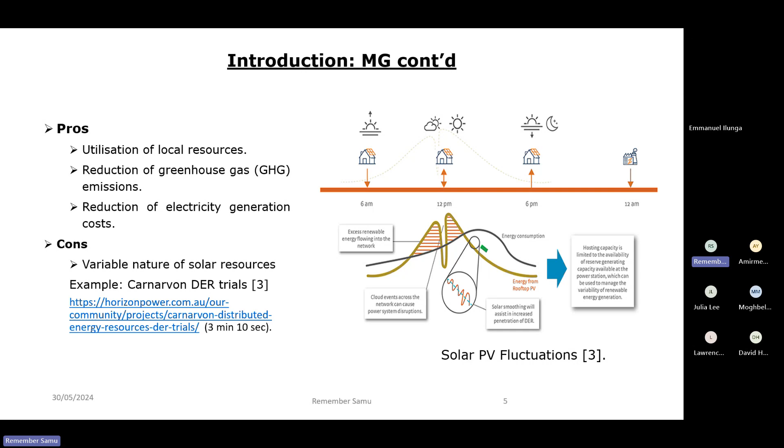One way of trying to minimize this effect of variability of PV is for us to be operating—if it's a remote hybrid microgrid, let's say it has got diesel generation and PV generation, and at this point let's say we exclude batteries—what will happen is that I will basically have to have a high spinning reserve to cater for the unknown drop in PV. So in this case, I'm going to have to run my diesel generators almost all the time at high spinning reserve.

So an example of such an event, where there was a lot of PV coming in and a cloud suddenly passed, actually happened in the place of this study, where this study was mainly focused. It's a remote area in Western Australia called Carnarvon. This small video will capture what happened in one of the days in Carnarvon.

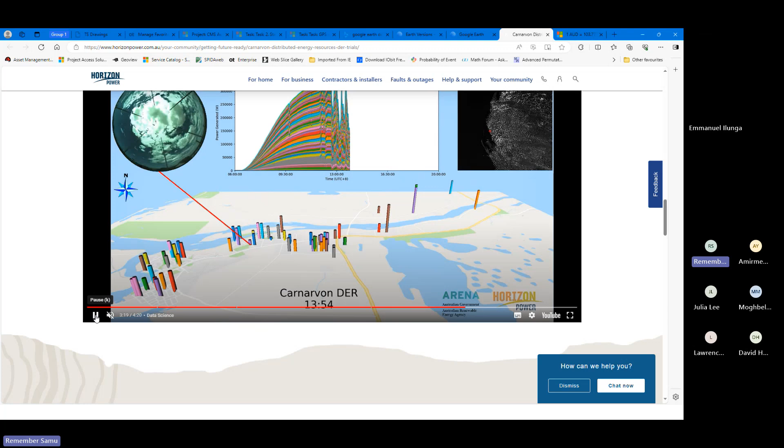What we're seeing there are distributed solar resources within the vicinity of this research. At one point we were having PV output generation fluctuating. A cloud was literally passing over this area, and this happened in real time. What we can see in the top left corner, depending on your screen orientation, is a camera showing how the cloud was passing through different PV systems, and the output of this being shown, where the power generation in watts in this distributed system was shown.

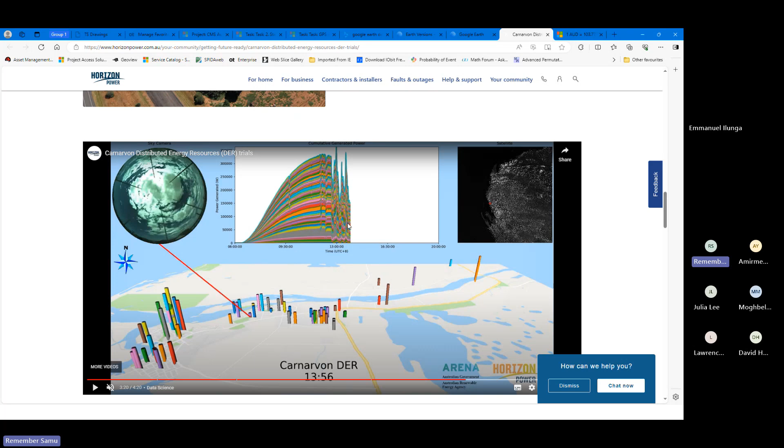This is actually a problem, because if this is happening and I'm not capturing that effect, not mitigating it on my system, then my system will either trip because I don't have enough generation, or at that point I will have more generation than what I need, because I'm not capturing that. All I can do is end up curtailing a lot of PV output because I'm not sure what's coming. Now, to mitigate all those effects, that's how I came about the problem we faced: with this increased distributed system, there's a variability in the generation output.

Now, this variability, how they're trying to cater for it right now, is either running a system with high spinning reserve. That is, at that point, you're having probably more than base load covered already, and limiting the PV output. So at that point, you are not utilizing full resources.

If you look at a real world scenario, Horizon Power, this utility, what they were doing before was having what they call hosting capacities. This was basically a way of saying, this is only the amount that we can actually put into our system. As of end of last year, they actually removed this capping of PV systems and tried to have ways of controlling as much PV as you can put without actually putting a cap on it. So this is the problem that we figured out.

So this research talk today is to try and see if we can minimize the effects of this, and if we bring in a new technology system, or a new system that will have a control strategy that will not minimize the penetration of PV, and at the same time will minimize the use of high spinning reserve, or the use of diesel fuel that is maintaining lower spinning reserve.

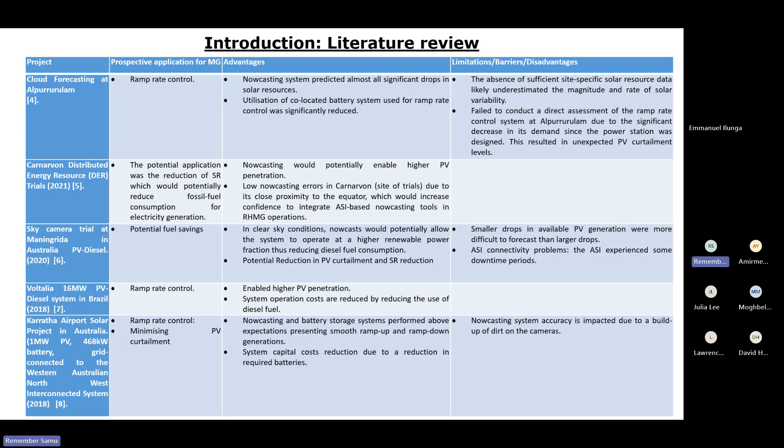Looking into different studies that were done, most of them are in the Oceania region, where there are small microgrids around the islands, and some here in Australia itself. They've tried to develop systems that do this nowcasting, but they were missing the controllability, or the automation of controlling the PV output, or they were missing the real life scenario of testing this—meaning using a real network to actually test the system they developed.

So this is what brought us to how I performed the method now. In this development, what we did first was to try and capture the thoughts of actually using nowcasting in trying to minimize—integrate it into microgrids and try to minimize the use of diesel fuel.

So this survey was an international online survey that was sent to developers of nowcasting tools, researchers working in solar PV or solar output forecasting, and industry people like developers or engineers operating microgrids, including remote microgrids.

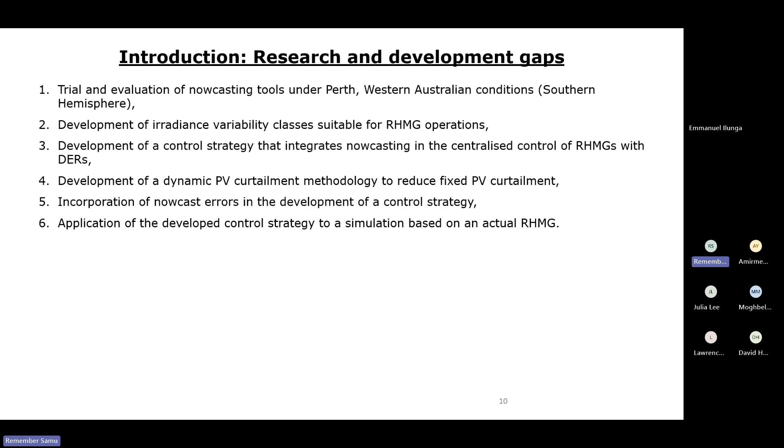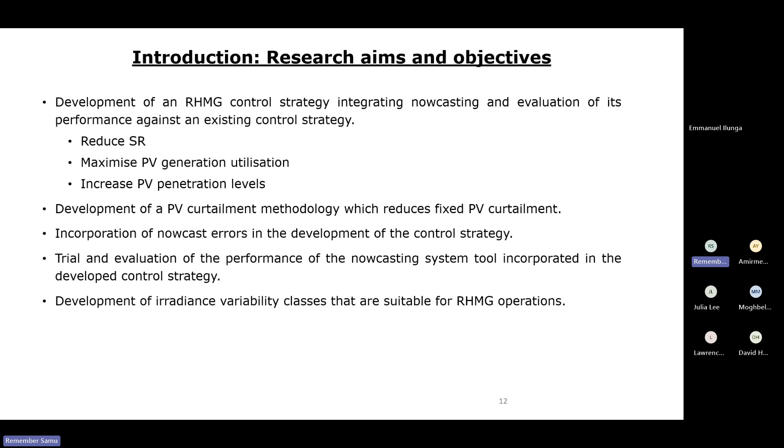All that would just be trying to answer the question that we raised in the questionnaire itself. So without wasting any time, we went into the methodology itself, where we did a bit of literature, then I did that survey, then after the survey we incorporated the literature and the survey.

Next we'll actually have the system, the nowcasting system, and do a trial of that system for the first time in the Southern Hemisphere, have it run and see how it operates compared to other sites that have been evaluated, then incorporate it in my realistic microgrid and run it to see the benefits. Basically that was what we did.

To start with, this was what the system looked like. Our system is called a nowcasting system. So nowcasting, like I said, is forecasting.

It uses sky cameras, meaning sky-facing cameras. There's a bit of research and calculation into the distance of separation of the cameras and the number of cameras you can use. In my case I used 2 cameras, separated by around 600 meters apart.

All of them were logging into a server, every 10 seconds, logging a new image. I also have other sensors to help with the forecast: a pyrheliometer for direct normal irradiance, diffuse horizontal irradiance, and global horizontal irradiance, all measured, plus meteorological data like wind speed, used as inputs to my nowcasting system.

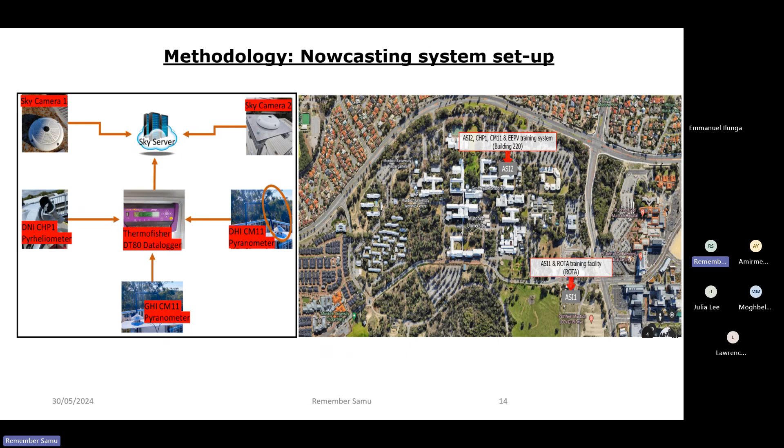Once I generate those 2 images, I enter them into my software, which is modeled entirely in MATLAB, though it's a bit of a complicated MATLAB code. I take those 2 images, put them in, and add the meteorological data that I mentioned.

From that software, with these 2 cameras, I would have a sheet which measures 8 kilometers by 8 kilometers. That's the surface area I can cover with these 2 cameras, so I can see 8 kilometers by 8 kilometers of my sky, and I can see all the clouds.

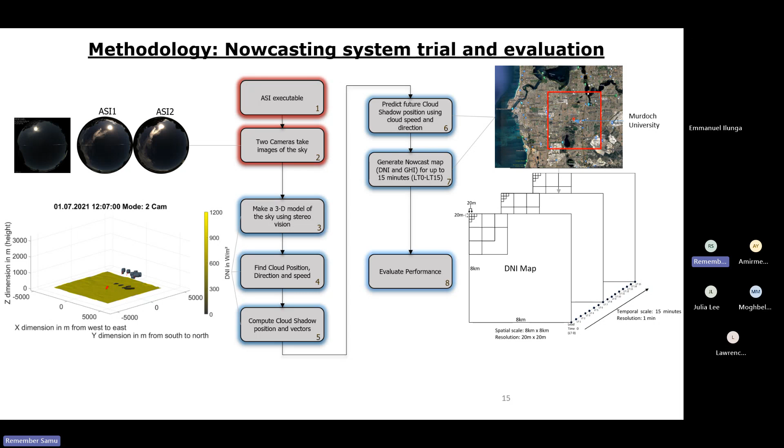So this first trial was to try and evaluate this system, the way it operates, and its accuracy. From there, I developed these 3 classes now. What I just need for controlling a PV system in a real life scenario is to know whether the day is going to be clear, overcast, or intermittently cloudy.

All right, so if it's partly cloudy or intermittently cloudy, or if the day is going to be clear, then I use these other metrics. There's a whole body of research that I did, a whole publication, and some metrics that I used to predict these 3 day types first, just from looking at the irradiances.

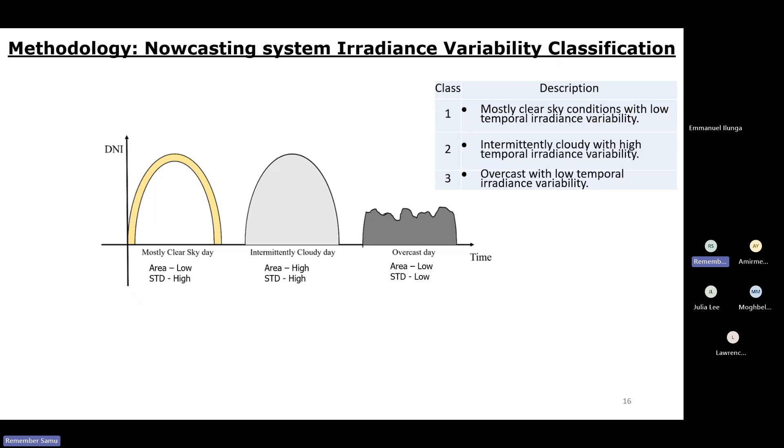Then after predicting those 3 classes, what I'll do is see - because I was using the RMSD, or root mean square deviation, which are metrics I use to check accuracy in any forecasting - just looking at this RMSD for my particular system, if we look at the graph where my mouse is, where it says direct normal irradiance DNI results.

If I look at my horizontal axis, this is looking into the lead time. So lead time 0, 1 up to 15 just means 1 minute ahead forecast, 2 minutes ahead, as I go until 15 minutes ahead forecast. Then here I'm looking at the root mean square deviation, meaning the error in my forecast as the lead time increases. So what I'm looking at now are those 3 classes I developed.

If you look at the class that has got the highest errors, it's the intermittently cloudy class, which is sort of reasonable in the sense that it's very difficult to capture the errors if I've got a lot of fluctuations in my output, in my irradiance.

But again, if I look at the 3-minute mark of that, it's not so bad, because I can still use this, as I'll prove later. I can still use up to 3 minutes. The error is still okay to incorporate in my control strategy and still find benefits out of it. Now, if you look at the one that has got the least errors, it's the overcast class. Where my sky is literally overcast, there will be minimum errors in my forecast, which is meaningful.

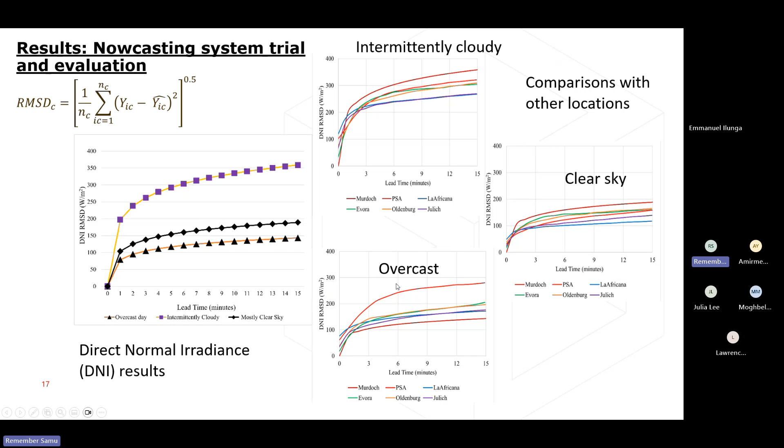Now, the next step was to go into, so this conclusion was the system was good compared to other systems, it was comparable. Then for clear sky and overcast, I've got very low mean absolute deviation and root mean square deviations, and intermittent cloudy has got higher, which is as expected.

Now these 3 classes that I developed - depending on what you want to use the system for, you can go into fine classification where you have more than 3 classes. Other systems had more than 8 classes because they were doing even finer classification of these cloud types or irradiance types. So these 3 classes that I developed are comparable and can be used - that's all I need to know, whether it's overcast, sunny, or intermittently cloudy, for me to run my algorithm of controlling remote hybrid microgrids.

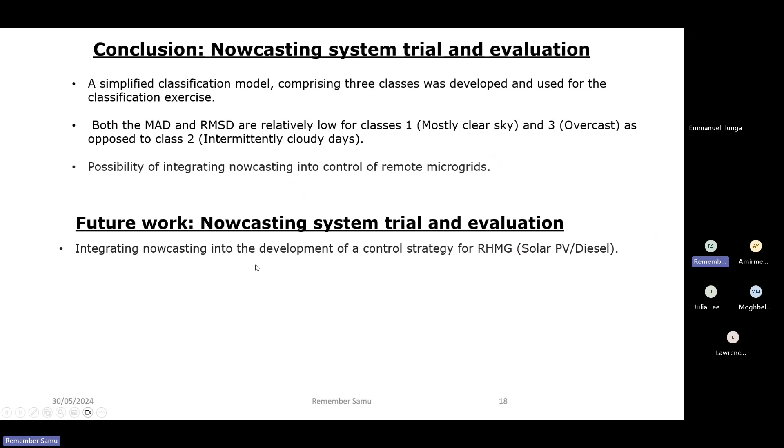Now, nowcasting system trial and evaluation came into place. At this point, we said, having this nowcasting, I've proved that the system is actually operable. It's operational, comparable to other systems.

Now, if I've got distributed solar resources, and I've got a system with diesel generators, can I then control centrally? Can I have a central control to satisfy my load 100% of the time, but try to utilize as much PV as I can with minimal curtailment, because I know the future, and just be able to switch on my generators when I need them and reduce the spinning reserve. So this was the next goal, trying to develop such a system.

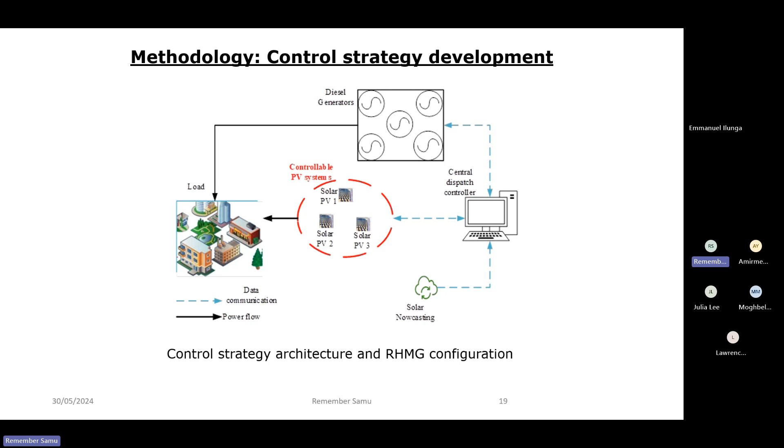So how I did it was basically to say, I've got 3 possible scenarios that can come up. If I look at my system or my output of my PV at, for example, 12 p.m., and I want to predict what would be my output at 12:03, 3 minutes after 12, 3 possibilities can be in place. One is I'm going to predict a higher output 3 minutes ahead, I'm going to predict a lower output 3 minutes ahead, or it's going to be equal. Okay, where equal might never be the case, but when I'm actually developing this algorithm or control strategy, I need to have that system almost in place. So that was the whole scenario.

If in 3 minutes ahead I'm predicting a higher output, I would look at how high this output is compared to my load, the load that I want to satisfy. If this output being predicted together with my diesel is going to be higher than my actual demand, then probably I need to switch off a diesel so I can still maximize the use of PV.

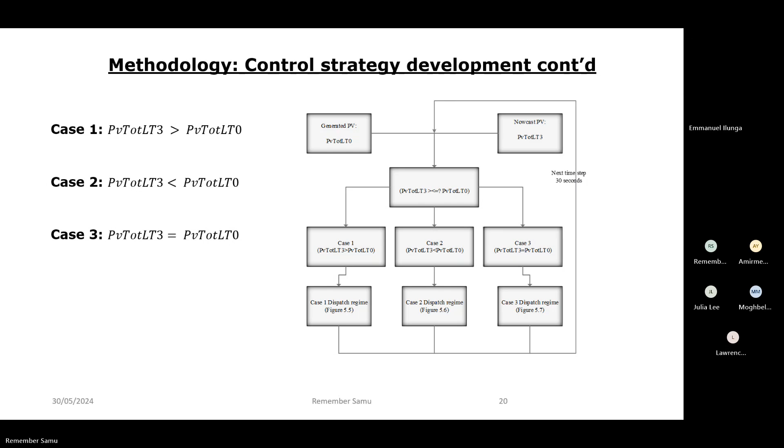So that was one scenario. The other scenario is if I predict less than what I can satisfy with my current mix, I'll need to switch on a generator if I don't have enough PV coming in the next 3 minutes. I can switch on the generator now, in time for those 3 minutes ahead. So these were the scenarios that would come up.

In designing this, first of all, as raised by the survey participants, they asked, what about the error in your system? Are you going to consider that error?

So I did, because I calculated the errors in my system. I did a worst case scenario design where, without any error, the top graph would be my output, my GHI for example. But if I introduce an error, over about 10 hours of a day, roughly 7 a.m. to 5 p.m., with the error this would have been my output.

So I designed my control strategy by incorporating the error. I would do it without the error, then also incorporate the error, and check whether my system would still be beneficial if the worst case scenario occurred, and what my output would be. So I considered these errors and formulated methodologies to incorporate them into my study.

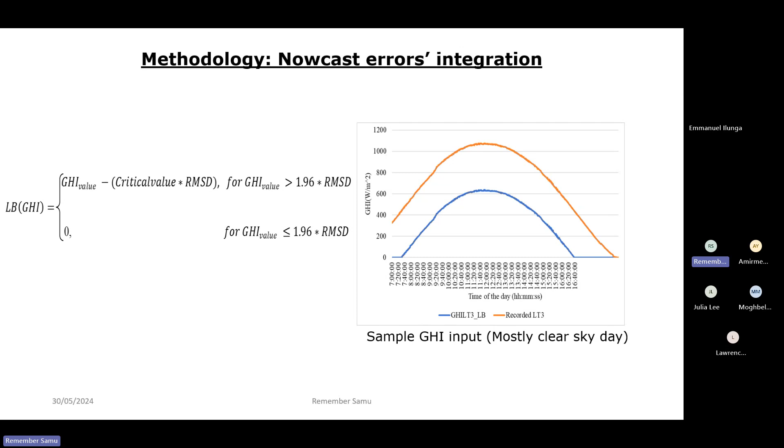Then there were 3 PV systems, modeled at 2.3 megawatts each. The reason is, without any curtailment, this was the maximum that could be put into the current system with a constant load. This is a pointer that could be worked on further, where we can have variable load in that.

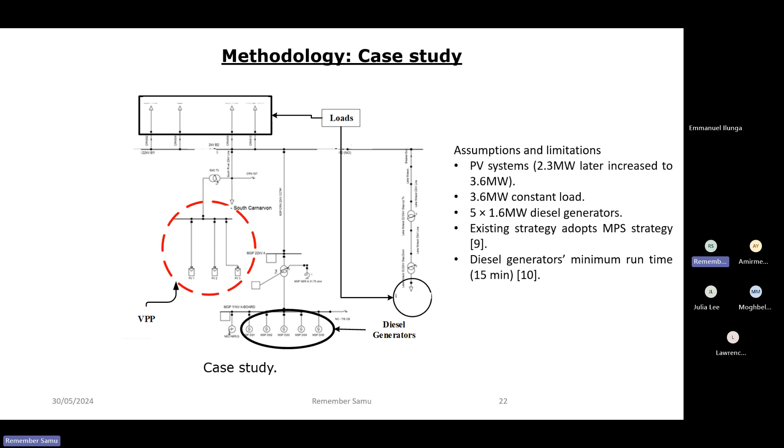With that system, the existing strategy would work like this: if it's intermittently cloudy, for example, we've got 3 generators on at this point because I'm trying to cater for the cover of that particular cloud that's coming. I don't know how much it's going to cover, but I still need to satisfy my load, so I run 3 generators all the time, depending on not knowing how much I'll lose, to cover for the unknown drop in PV.

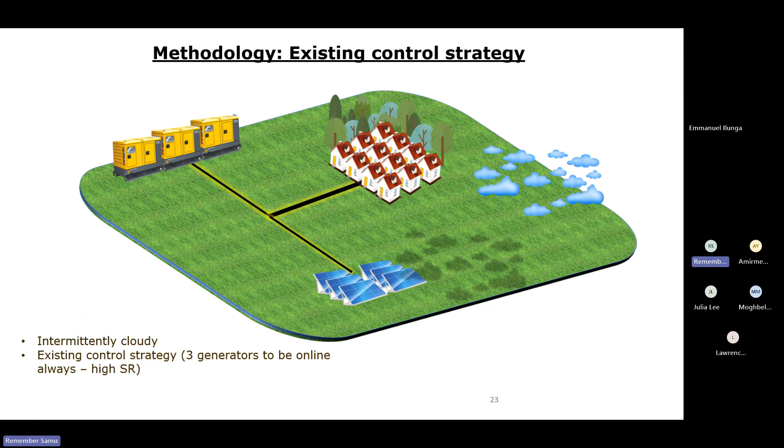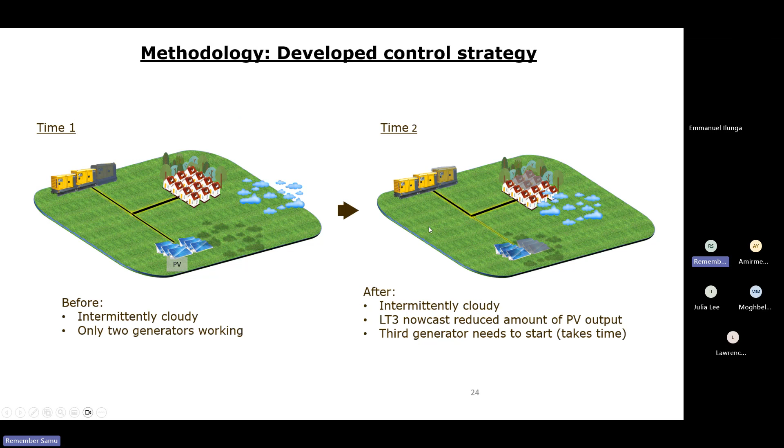Now with the developed strategy, at time 1 I can see the cloud coming. I've used my generator and everything, but because I know the direction of the cloud and when it's going to get there, I can be happy to run 2 generators instead of 3, until I know that in 3 minutes, at time 2, the cloud will cover this part of the PV, and then I can turn on my 3rd generator in time. That's the developed strategy: use 2 generators, then switch on the 3rd generator in time if needed. That's the whole concept.

I know the position of my cameras, so I can map my clouds and map my sky. With that mapping, I develop the direction and speed of the cloud, know how much area it's going to cover, and later know when to switch generators on or off. This is the basic operation of how this system would work.

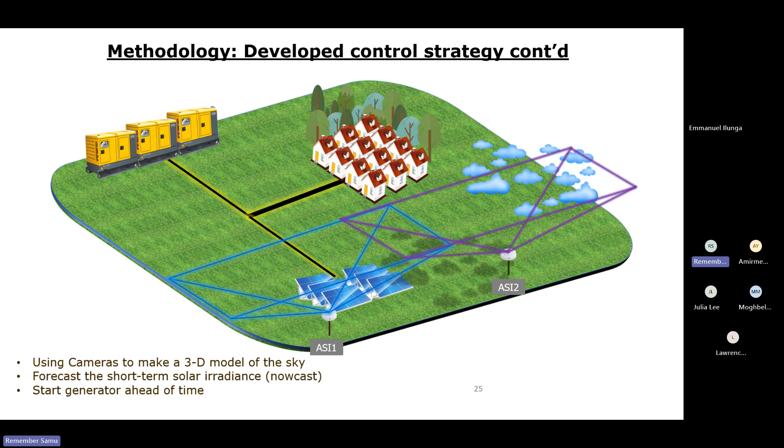Now, into the results. The first thing we did was look at an example of an intermittent cloud, which I've produced here. Of course, I had other classes and different scenarios, but this one is more interesting to capture, to see what would happen in my actual case with variable output of generation. So if you look at the graph labeled existing control strategy, adopting the Mungullah power station strategy, this is actually the power station where this strategy is currently applied.

They were running between 1.6 to 3.2 megawatt. That was the range of their spinning reserve strategy, so that their spinning reserve would keep to be up in that sense.

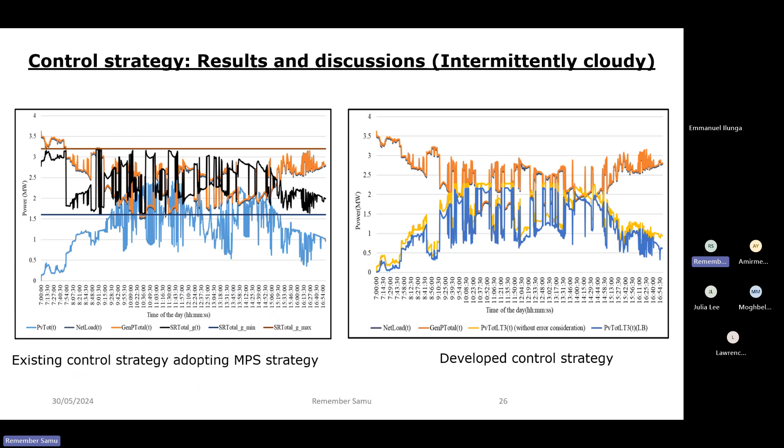Now just to zoom into this particular output, if you look at the black line, which is basically the spinning reserve of the current strategy, it keeps to be up all the time because I don't know what time I would need to switch on or switch off my generator, so I'll have to keep it up.

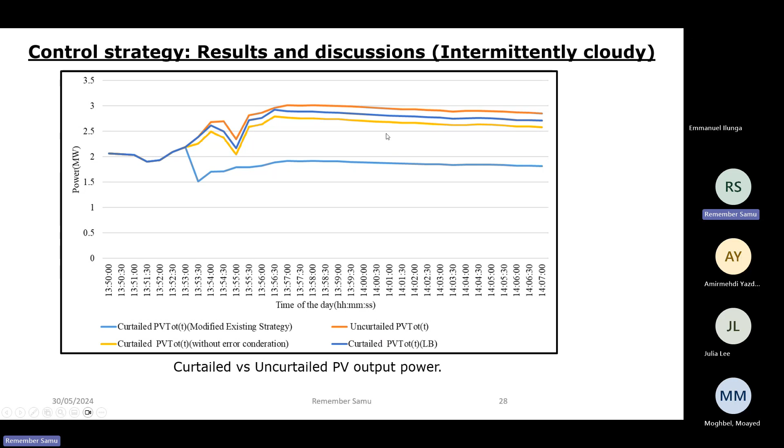So still at this point, I saw the advantages that I would curtail a lot if I'm using the existing strategy, but with my developed strategy, compared to the real output of PV, my developed strategy would sort of follow that suit and just minimize the curtailment, meaning I'm using more PV in my system.

Now just looking into the advantages that came up, just a few pointers. There were fuel savings in both my systems, about 14% fuel saving compared to the existing strategy. Then as well, curtailment was very reduced compared to the existing strategy. So the percentage is the number that I would want to catch. I would be more interested in the value-wise, because this could be any system, modeled anyway, where we've got the same sort of setting of a remote hybrid microgrid.

So I'll just go into the percentage saving here. About 14% of fuel was saved in just one day. This is a daily fuel saving, by the way, just 10 hours of saving, because my system would go to the existing sort of strategy way of operation at nighttime, but when daytime comes, I switch to this particular type of configuration.

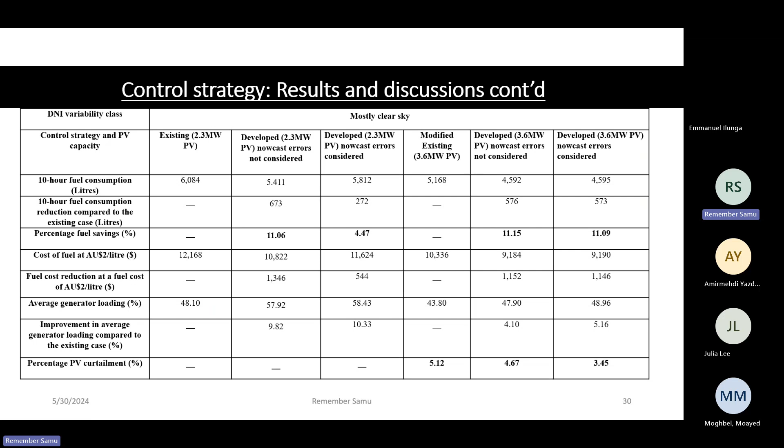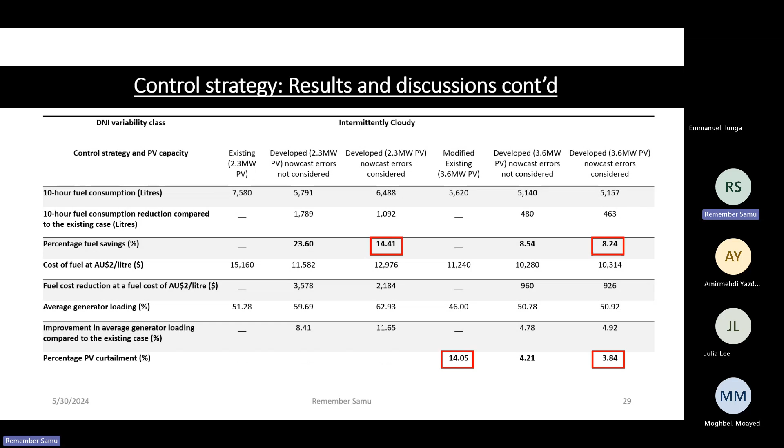Then, of course, more results would come into different sort of classes. Depending on the type of class, you would see different savings. So I just mentioned the intermittently cloudy because these are the ones I did a bit of presentation here. But all the classes were determined, and there were still savings in all classes basically.

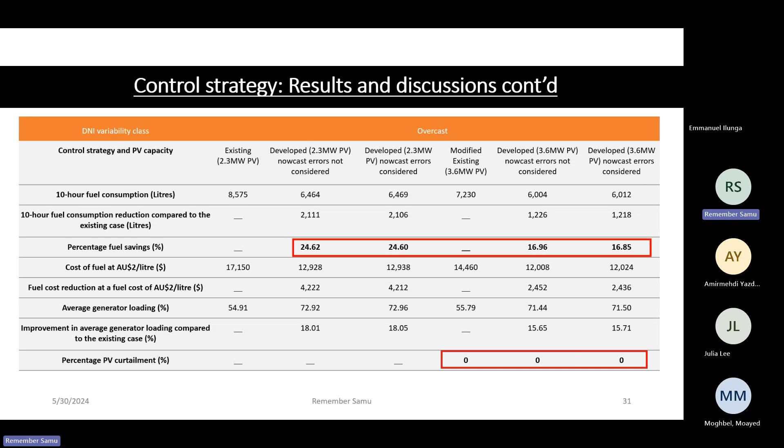As we see on the overcast class, there was no curtailment. This is expected because I don't expect to have a lot of PV being generated, but still there were fuel savings compared to the existing strategy. We identified that if we can trial this system further away, we can incorporate it into remote hybrid microgrids. This system was successfully developed and integrated into a real microgrid, and we saw its operational benefits in terms of fuel savings. Because we were able to do this in a realistic microgrid, this research can be transferable to any other remote microgrid with the same configuration.

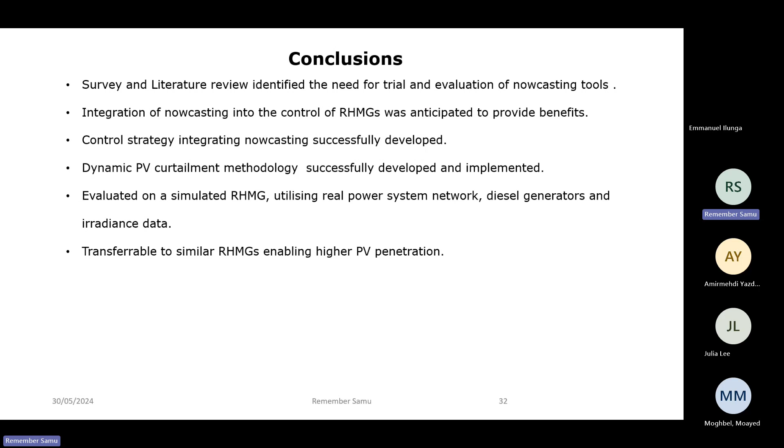These were the conclusions that we figured out, and the contribution to the research could be further determined in the publications that were published.